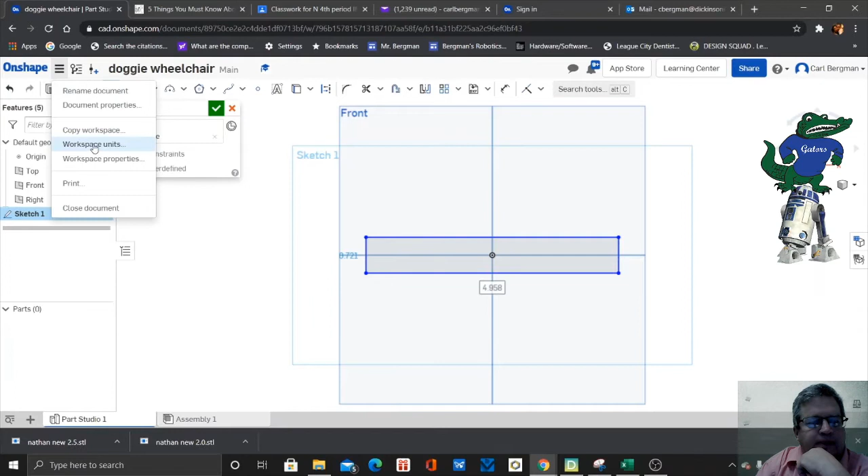Sketch front plane, and let's see, center point rectangle. Alright, so it's going to be 15 inches. Make sure you're in inches, by the way. 15 inches by 1.5, and extrude it by 12 inches.

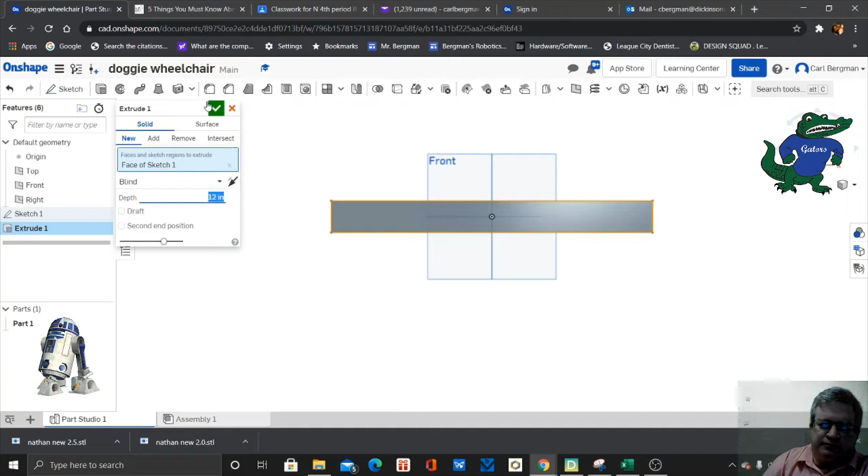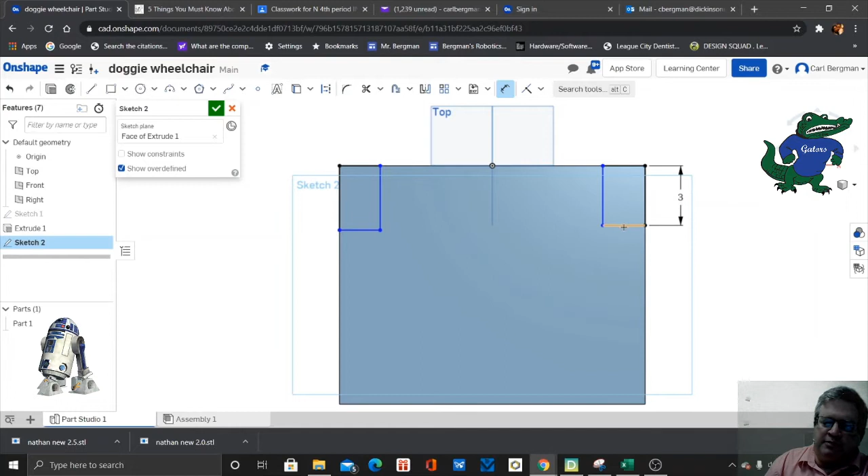So this is going to be the platform that kind of wraps around the dog, and it's going to go from the midsection of the dog back to its hind legs. So what we're doing here is we're creating a wheelchair that can help out a dog that's either had an amputation, or born without the ability to walk on his back legs, or just went through surgery, and so we're going to create this wheelchair for it.

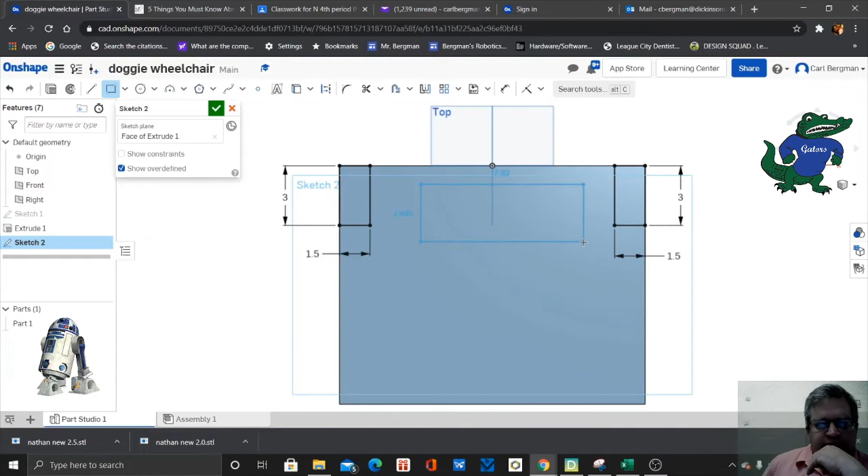So those are 3 by 1.5 inches. Those are just corner rectangles, and we're going to do another one in the center. We have to have the back and the front open, and we'll just have a kind of a beam that goes across the middle, and then we're going to put a pool noodle across the middle of that so that the dog can rest on the cushion for that.

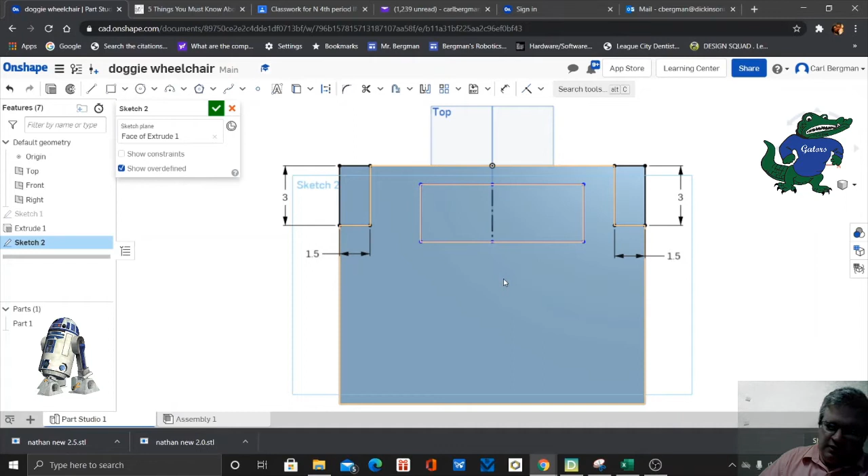So we're going to find the center point, and I think I'm going to struggle with this one because it's still kind of off. I think I accidentally picked the center point of the bottom platform instead of the sketch. So I make mistakes. Anyway, so we're going to try to, I think what I'm going to end up resulting to is just make them parallel, and then they squish together. But I could have done a better job on this, at least this one anyway.

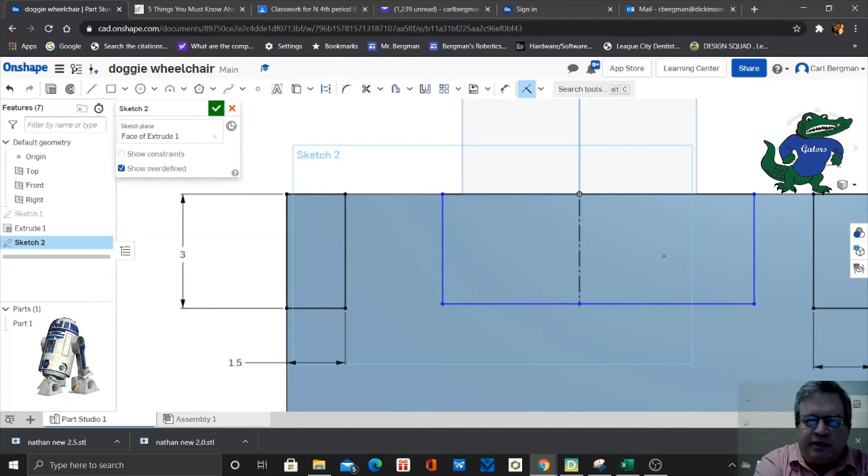So I made them coincident by picking the side and the point, but I'm still not centered. You don't want this thing to be off center, because if you strap this thing to the dog, it's going to be running sideways. You don't want that. So you got to find the center point, and finally selected the right sketch. And so I found the center point of that square, and I just click on those two lines or the points.

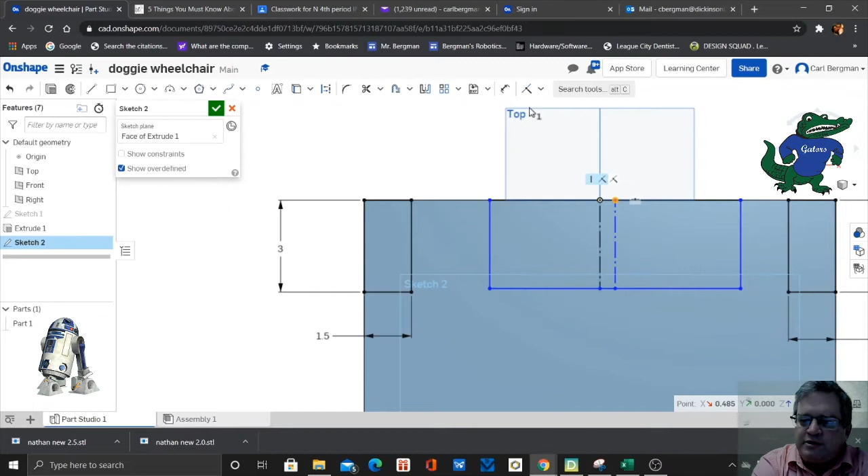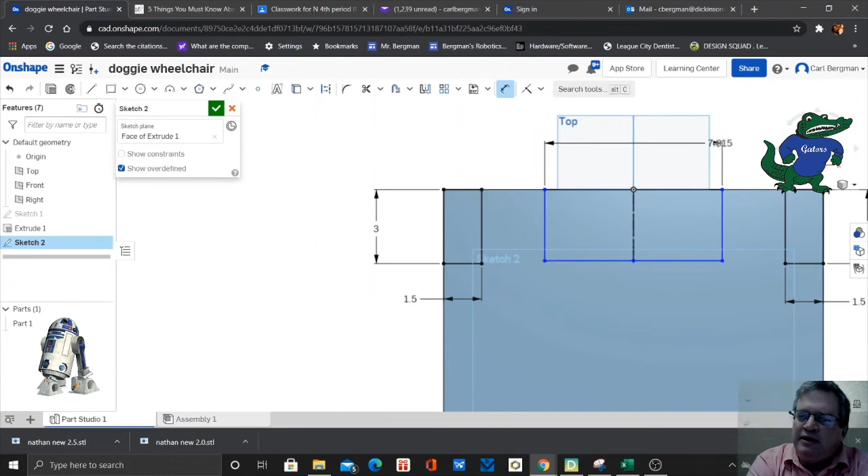And I think when I did not grab onto that point. There we go. Let's see if that works. Yeah, okay, that worked. All right, so that's centered, and so the Chihuahua is going to be about 10 inches wide on its hips. So I think, yeah, I went 10, but we may want to go a little bit wider on that. But the beauty of this, you can go back and you can change it depending on the size of the dog. If it's an adult Chihuahua, it's going to be a little bit larger than 10 inches.

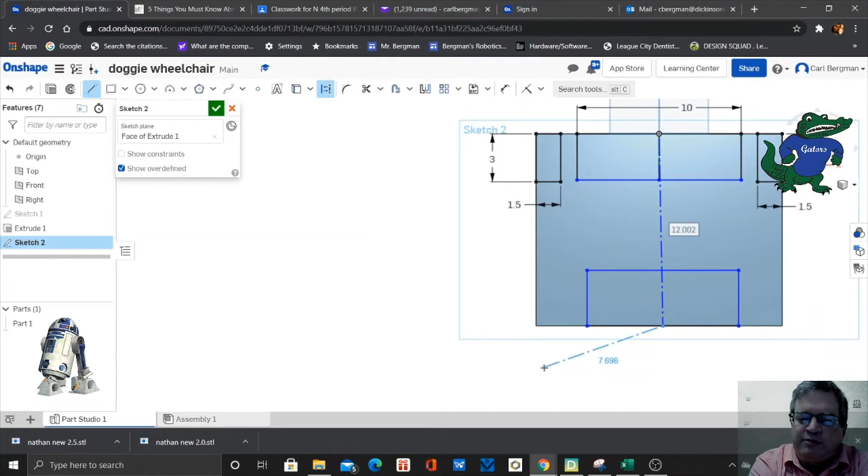So we got to make sure we center the front too. And so these two center squares are going to be removed from the bottom platform, and that's going to allow the dog to put its front legs up there and run. So that's where we're creating that.

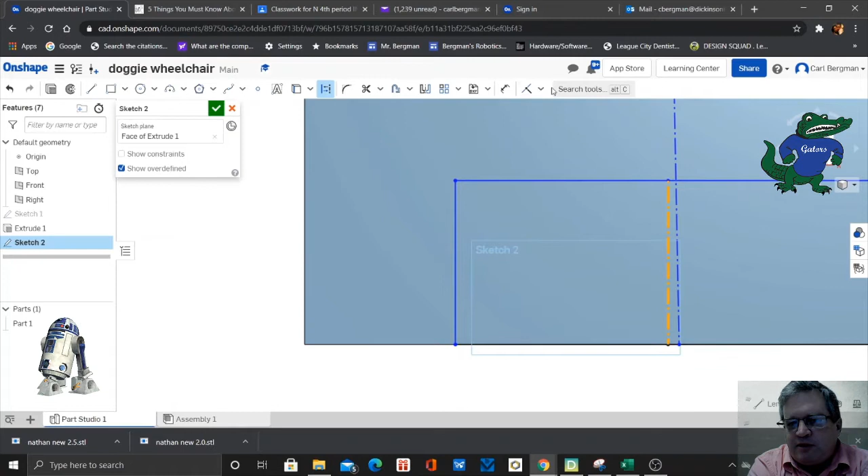All right, so I'm going to find the center point. It's just slightly off, I think. I'm off by just like a real small amount. I think I don't hit my mark on the vertical, so you can see my mistakes live, guys. So what I would do is I'd want to make that thing vertical. I think it gives me a hard time. I'm not sure. Maybe my other center line's off. I don't know. Let's see what happens if I match them up.

So I tried to fix parallel, but that wasn't working too well, so I think I just said let's go coincident. Oh, the parallel did work - I must have had something else selected. All right, here we go.

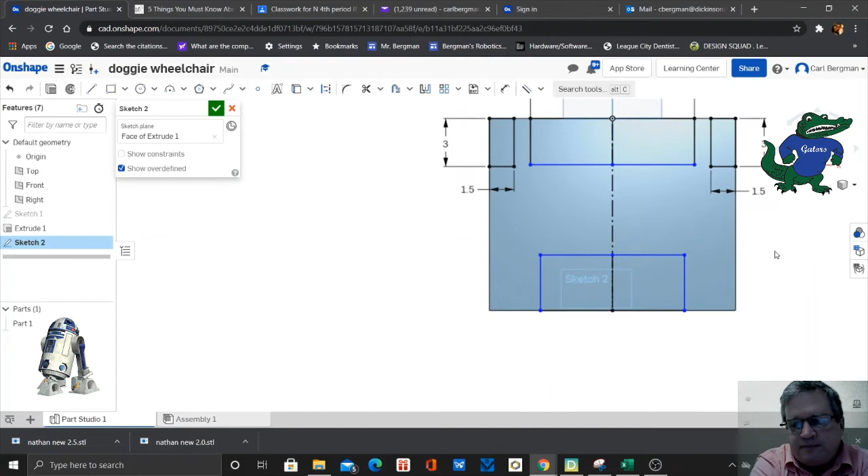Now we've got everything measured. Oh, we don't have one measured - that's going to be 10 inches as well. And I'm not sure if I measured the depth of that.

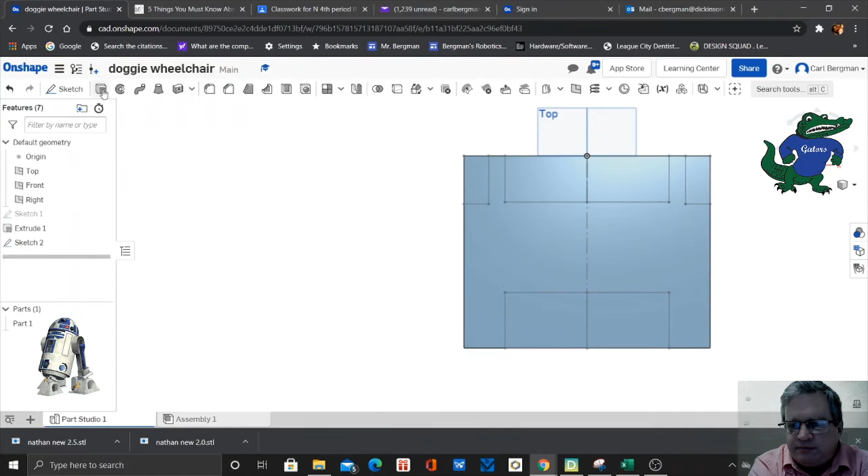So once I find some candidates, I got to call up the shelters and the SPCA and get a list of dogs that need this thing. Then we can go back into our sketch and readjust for the size of the dog.

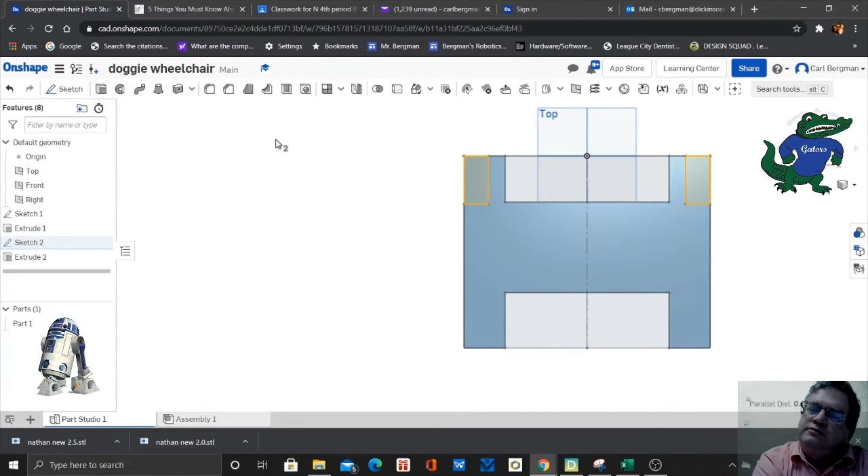All right, so these two side corner squares are going to be where the axle is attached, and we're going to extrude that by 3 inches. So type in 3 inches, and there we go.

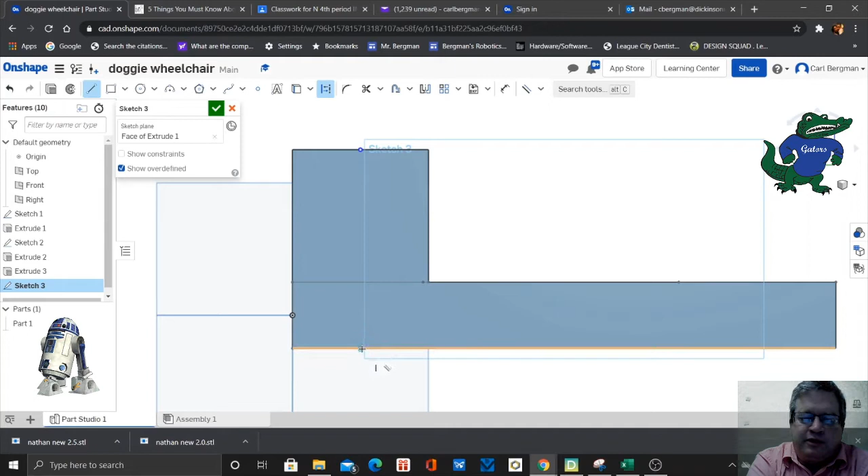Click OK. Now we need to sketch or cut out a hole for the axle, and the axle is going to be 1.745 inches in diameter. So we want the hole in this bracket to be 1.75 inches in diameter, so the axle is going to be just a little bit smaller than the bracket.

So what I'm doing is trying to find the center point. You hover over that and find it, the square, and bring it down, make sure it's vertical. You'll see the little vertical indicator. Press escape to let go of the line.

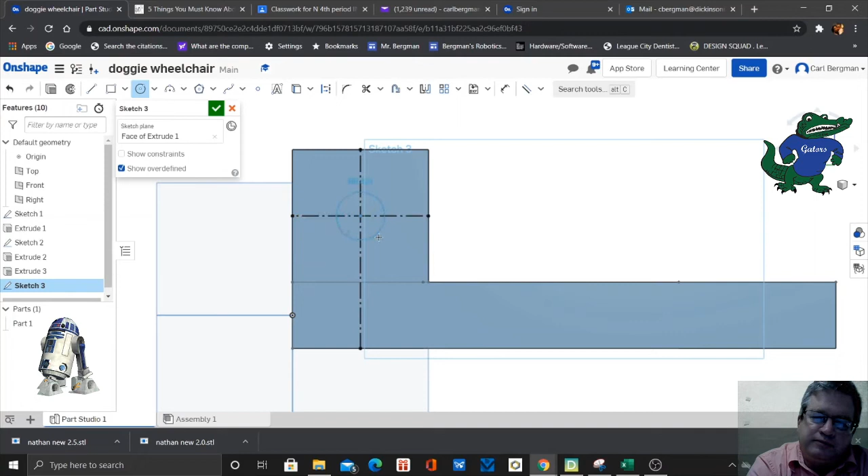I'm going to make another construction line going down the side. There we go, bring that across and click it. All right, so there's my center point. So, center point circle, and we're going to make this 1.75 inches in diameter.

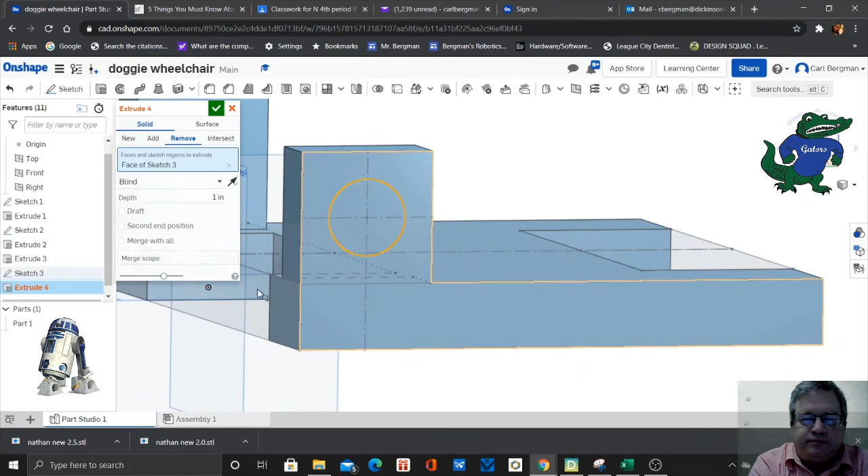There we go, and we're going to extrude and remove. We're just going to select that, and we're going to pull it all the way through to the other side. Just grab on that arrow, pull it all the way through, and there we go.

Hold on, I got to plug in my laptop. Battery's dying on me. Okay, can't have that happen.

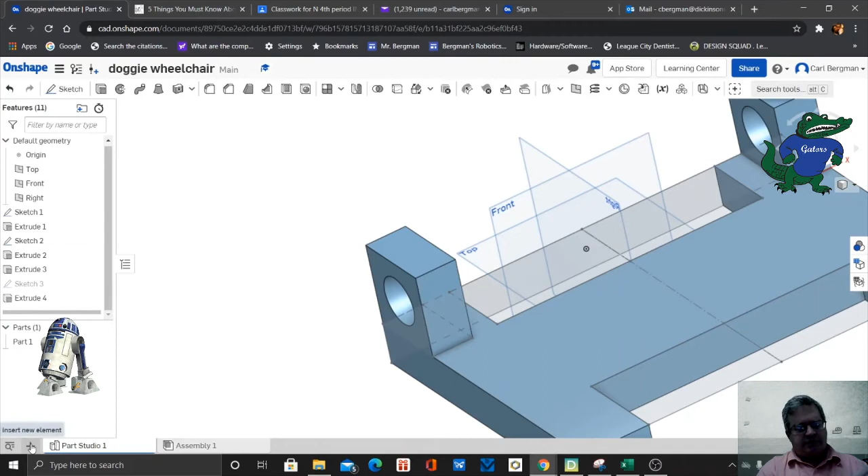All right, so we got the axle holes cut out, and the next step is to create the wheel. So we're going to create a wheel.

All right, so we're going to create the wheel, and we're going to go sketch front plane. I think we're creating the wheel - next step is, yeah, wheel. All right, so you right-click on the tab, and you can rename it wheel. I'm going all over the place on this darn thing - this is what it looks like when you're looking into a mirror, behind a mirror, behind a mirror.

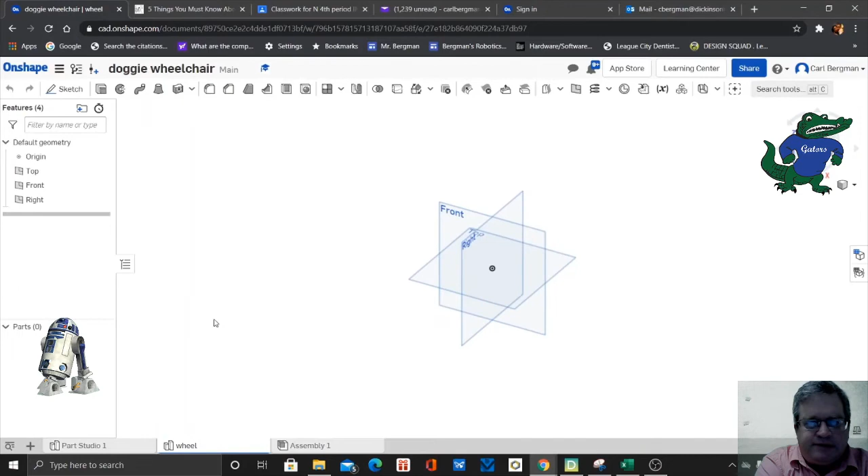All right, okay, so it's running. Okay, sketch front plane. Zero in on the front plane. We're going to do

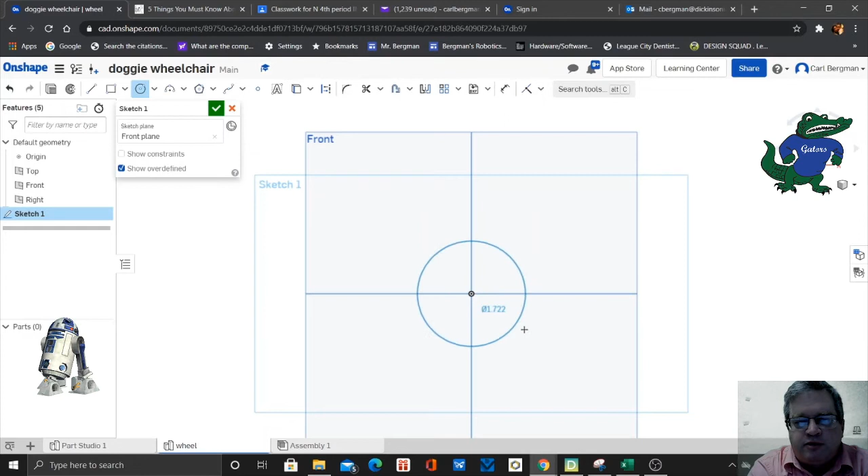an 8-inch diameter wheel, so it's going to be a center point circle. Bring it out, and we're going to measure the diameter for 8 inches. Select our measuring tape, dimension tool, click in 8. There we go.

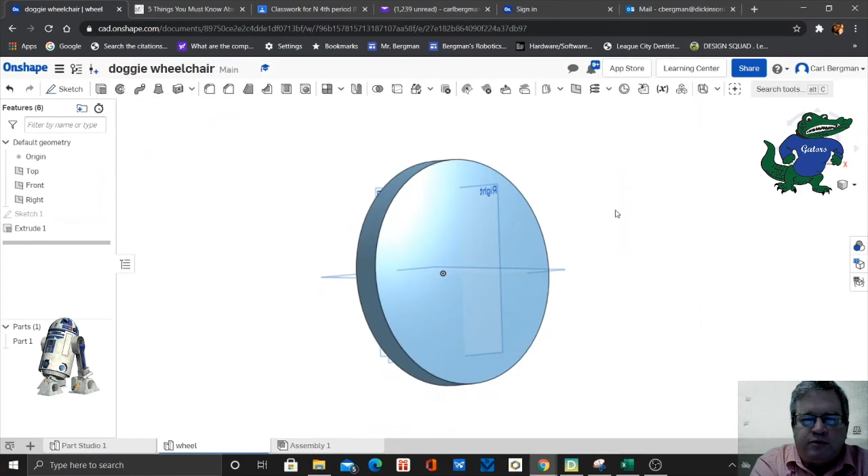So we're going to extrude this 1 inch. Half of 1 is 0.5, so we're going to fillet both sides by 0.5, which is going to round off this wheel. So we're going to select the edge, select that side, then flip it around, right-click, and select that side, and we're going to fillet it by 0.5. So we know the width of that wheel is 1 inch, so half inch and half inch on both sides is going to make that a round wheel.

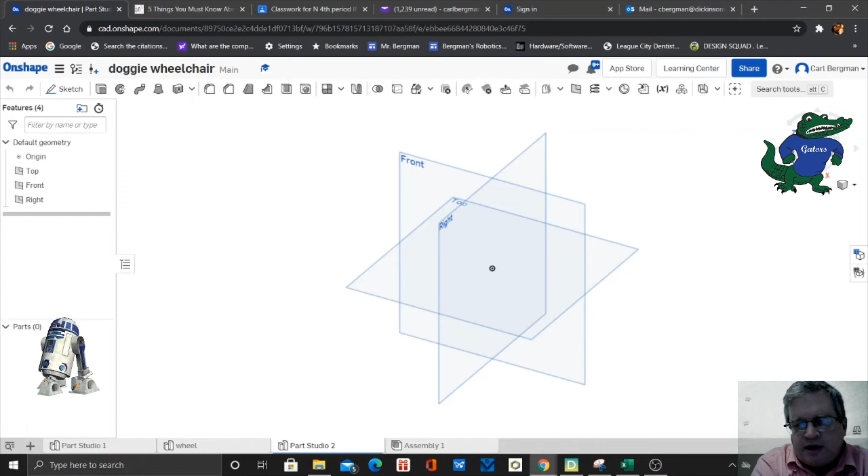Okay, all right. So in other versions of this, I did create some designs on the wheel, but I think I'm going to leave that up to you, and I'll do that in another lesson.

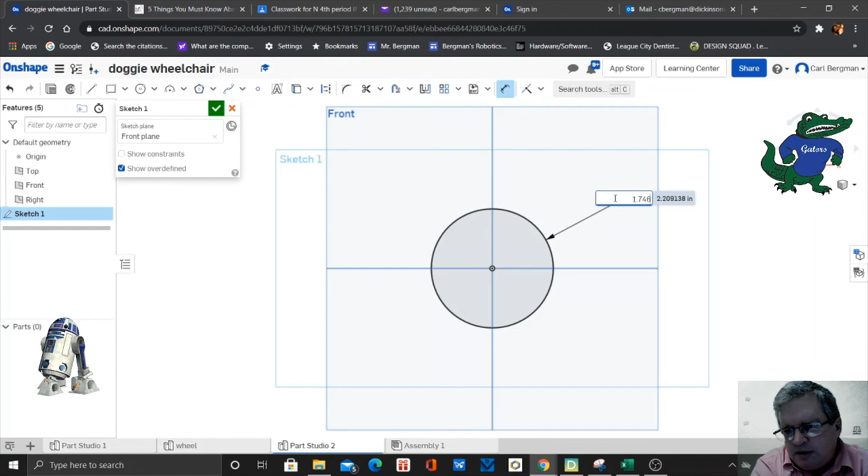So now we have to do the axle. We're just going to do a center point circle, and we know that the width of the platform is 15 inches, so we're going to do 1.745, 1.746 maybe, just barely skinnier than 1.75.

So we're going to make this 16 inches, so it's going to stick out a half inch on either side of your wheelchair, because the wheelchair is 15 inches wide.

Now we've got the axle, we got the wheel, and we got the chassis, and so now we're going to create an assembly. I already got a tab already down there. You can create assembly by clicking on the plus sign on the bottom, and you just create assembly, and then you bring in your parts. So I got my axle, and I got 2 wheels.

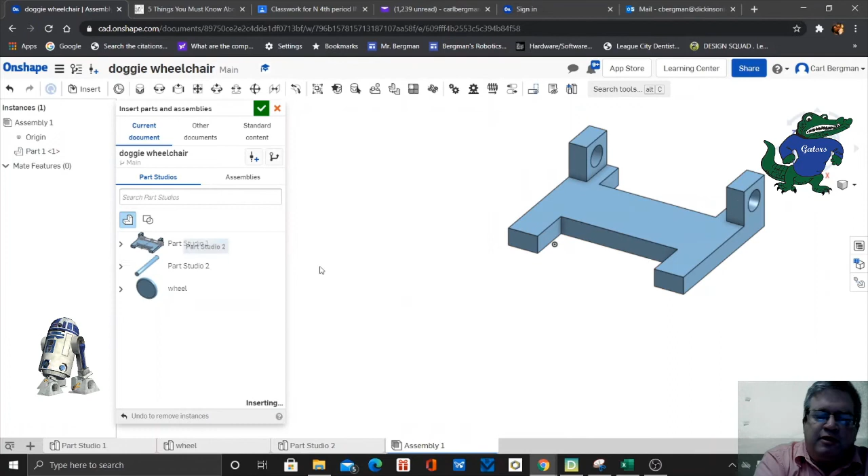Bring them in. There we go. All right, so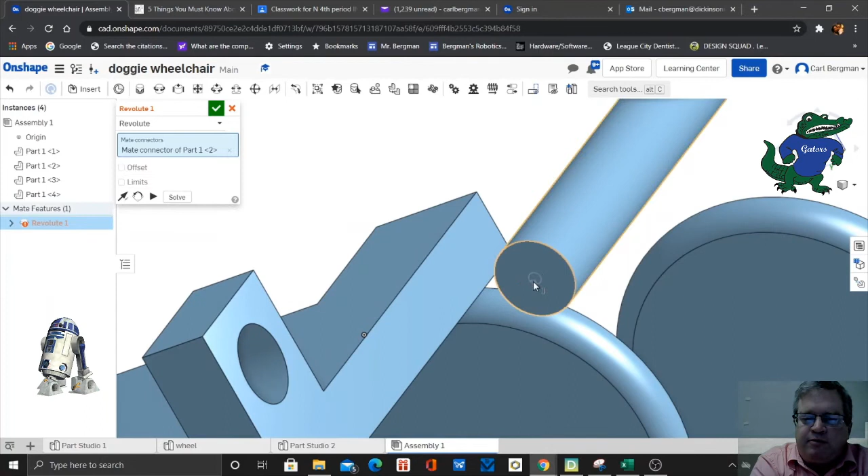We want the axle to spin freely inside the brackets. So we're going to pick a revolute, and we're going to pick the end of the axle and the face of the hole that we carved out, and we're going to offset by 0.5 inches. So that centers it in the middle of your frame.

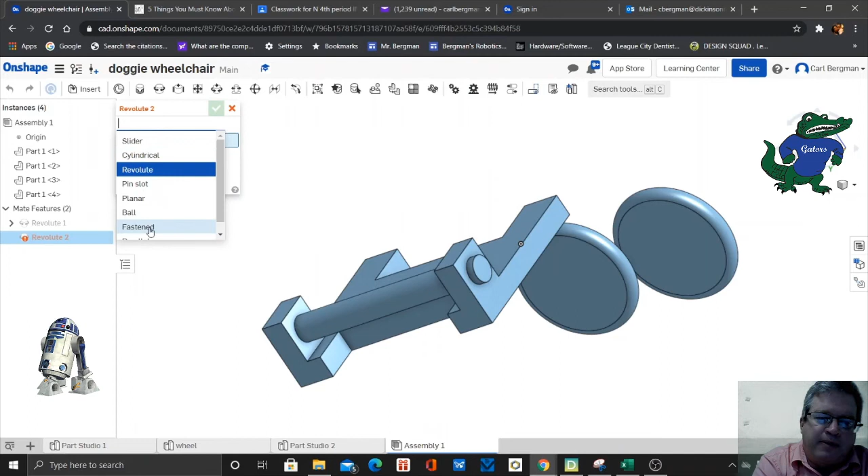Okay, so the next thing we're going to do is we're going to attach the wheels. We're going to change the dialog box to fasten. We're going to fasten the wheel to the face of that, rotate around, and we can see that it's a little bit too snug. So we're going to click on that arrow, and it's going to rotate the axis so that you have a little bit of space for your wheel to move around.

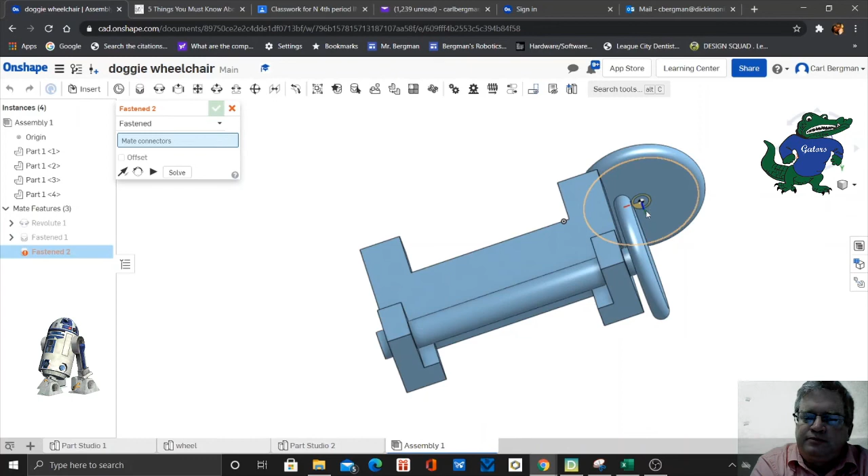All right, so then you're going to take the other wheel, find the face of it, click on it, click on your axle, rotate around. It is a little tight, so we're going to go over to our dialog box, and we're going to rotate either one in the middle or the one on the left, it's fine.

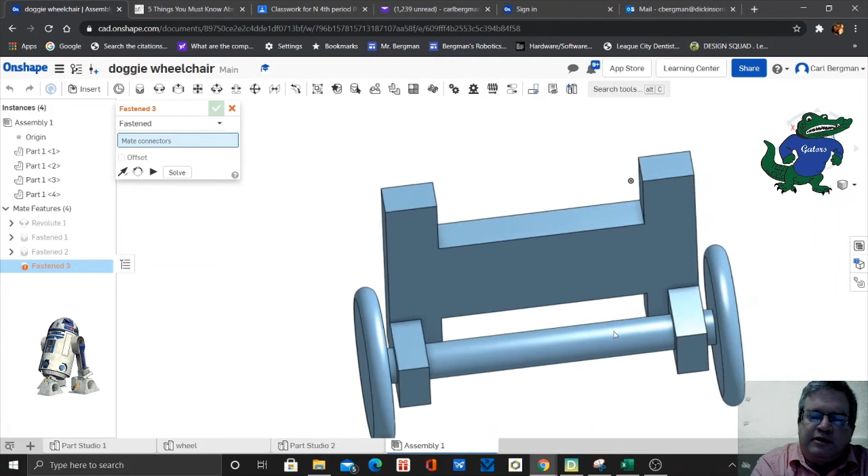So now if I were to grab onto that, or I can press motion and it'll start going. Oh, I'm sorry, let me back up. You do have to lock this thing down. So you have to lock an edge to your point of origin. All right, so you lock it in there, click OK.

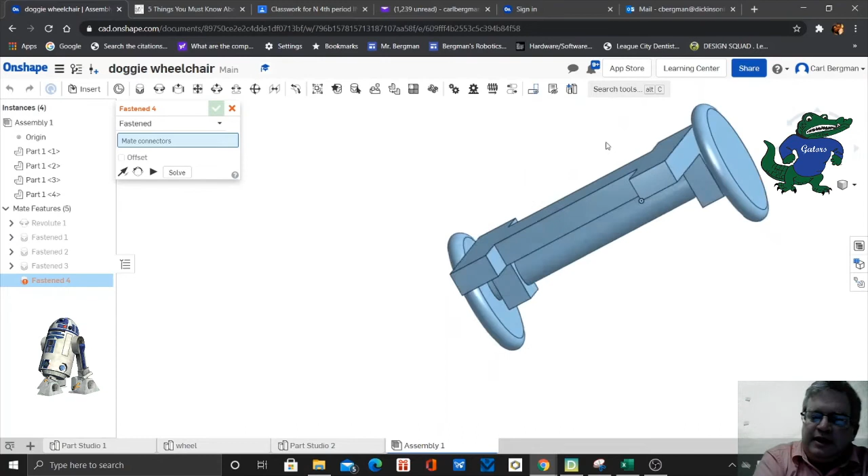Now if you want to rotate your wheels, it's locked down and you can rotate your wheels. So you can grab onto your wheel, and what we're going to do is we're going to do a design. So I didn't know if we're going to do it in this one, but we're going to do a design.

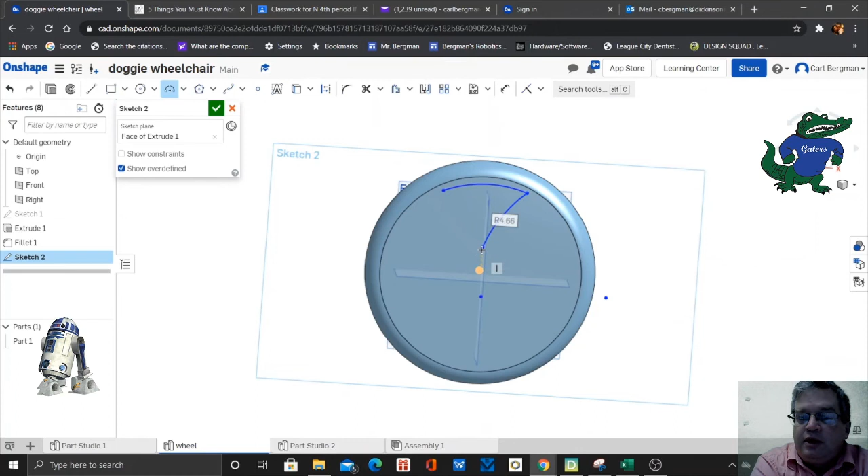So we're going to select the surface, and we're going to cut out a hole in that, and we're going to use a 3-point arc, and we're just going to cut something out. So when you do turn the wheel, you can actually see the wheel turning because we have a little bit of contrast in the surface.

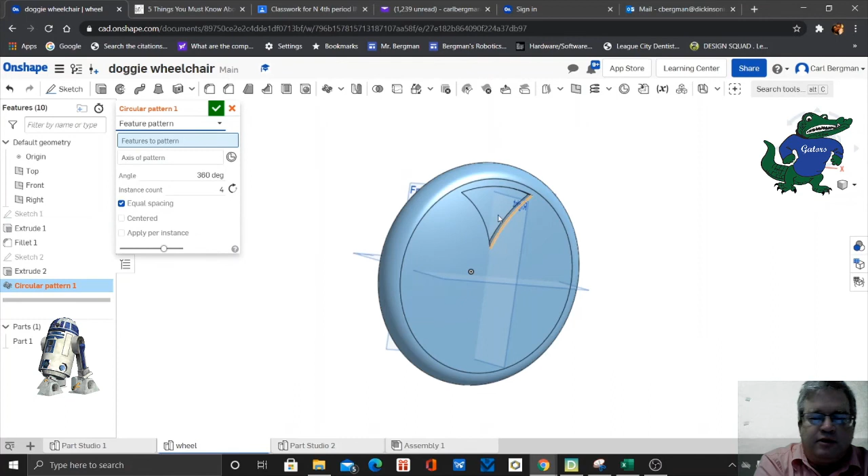So we're going to remove, just enough where you can see it, and then we're going to go circular pattern, and that's a feature, so we're going to change that to feature. Select your feature face, and then your axis is going to be the inside diameter of the wheel, and there you go. Put in 4, 5, 6 might fit.

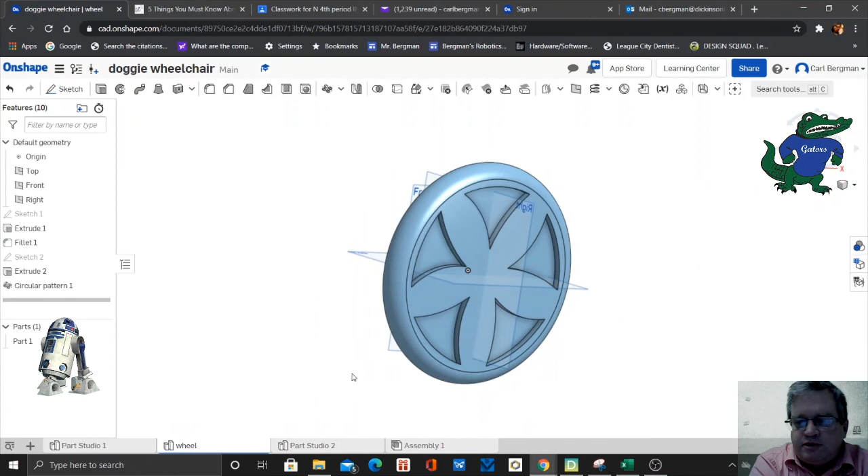So it does update your wheel, and so when you grab onto that wheel and you turn it, you can't really see the other wheel turning, but what I'm going to do is go back to the wheel and pierce a hole through it so you can see that the other wheel on the other side of the doggy is turning as well.

So I'm just going to go sketch, and I'm going to just do a center point circle, and I'm just going to put a small little hole through that all the way through the wheel so you can see what's going on. And we're going to remove and all the way through.

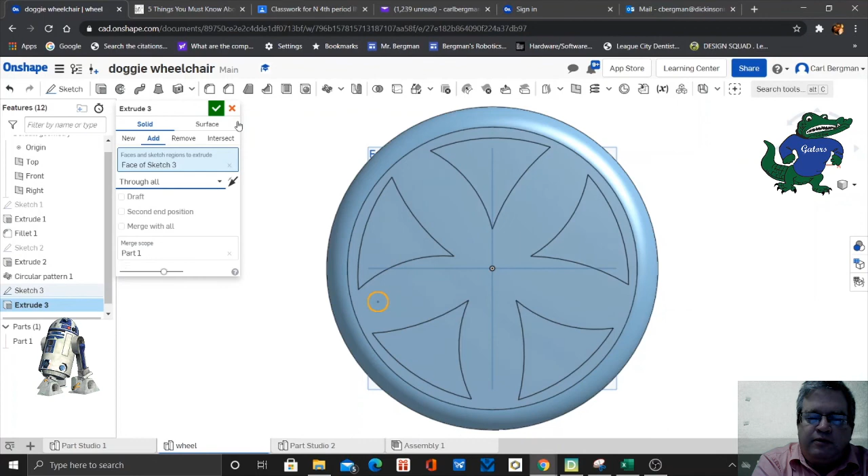Oh, I'm going to go back the other way. I think I forgot to go edit and then remove. I'm supposed to pick remove. And then you got to pull it through the other side. And blind, pull it through the other side there.

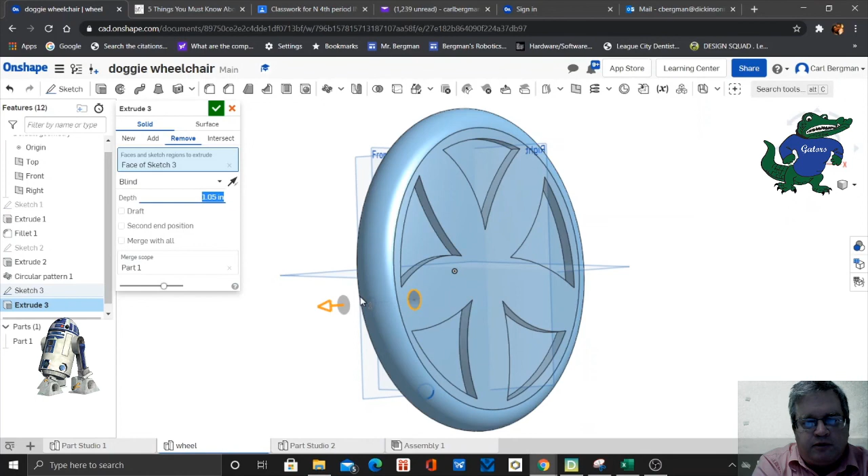Alright, and then go to the assembly, and it updated it. So once you pull that wheel around, you can see the other wheel on the other side rotating. That means you've connected it correctly, and that is your doggy wheelchair.